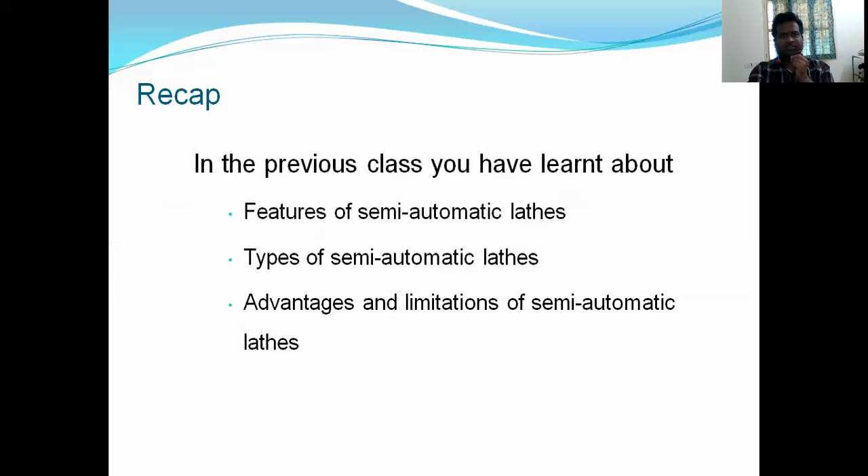Why are production lathes designed? To meet customer demands. We have chain lathes, with some changes made on the engine lathe, that's why production lathes were developed. In today's session, we are going to learn about the copying lathe, and its comparison with other types of lathes, features of copying lathe, comparison with other types, and suitability.

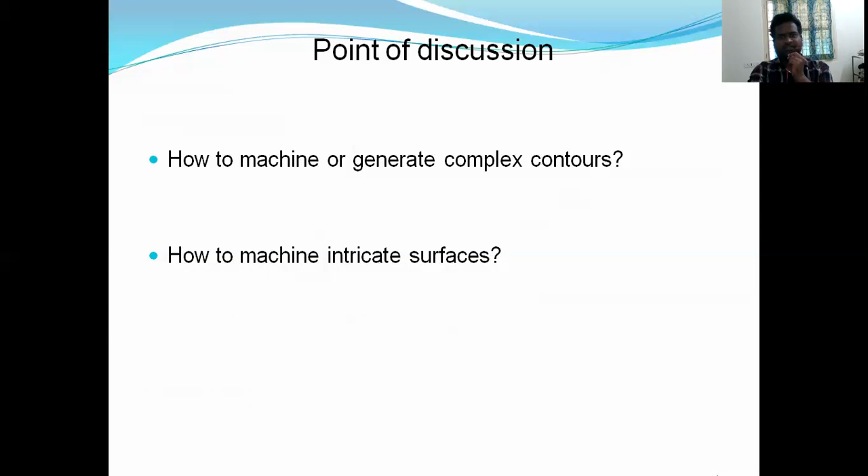Before discussing the copying lathe, how do we machine or generate complex contours? How do complex shapes develop on the lathe machine, and how do we machine intricate surfaces? These are the questions that arise when doing operations on the lathe machine.

The solution is solved by using the copying lathe. As we discussed copying lathes in our types of production lathe session, we covered some points there. Now we're going into depth about the functions of the copying lathe - how to machine or generate complex contours and intricate surfaces. Intricate shapes, surfaces, and complex contours are not manufactured under general lathe machines; we need a special type of lathe machine, which is the copying lathe.

Let me remind you how this works. We use one stylus. The stylus travels on the masterpiece, that is the template. On the template it travels, and the cutting tool travels on the workpiece. By this, the manufacturing process is done on the lathe machine.

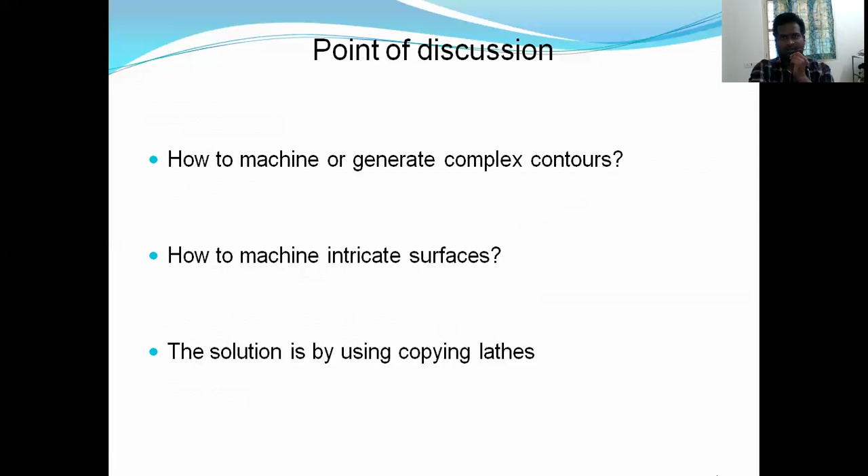The copying technique was introduced in 1923 in the USA. First it was introduced in the USA, and for some time the copying lathe played the main role in reproducing accurately the shape of the template.

So this is the history about the copying lathe. It was developed in the USA in 1923, and for quite some time the copying lathe was important in reproducing accurately the shape of the template.

Copying lathe, we have already discussed, is used for contour shapes and intricate shapes. So what are the contour shapes or intricate shapes that we have to discuss now.

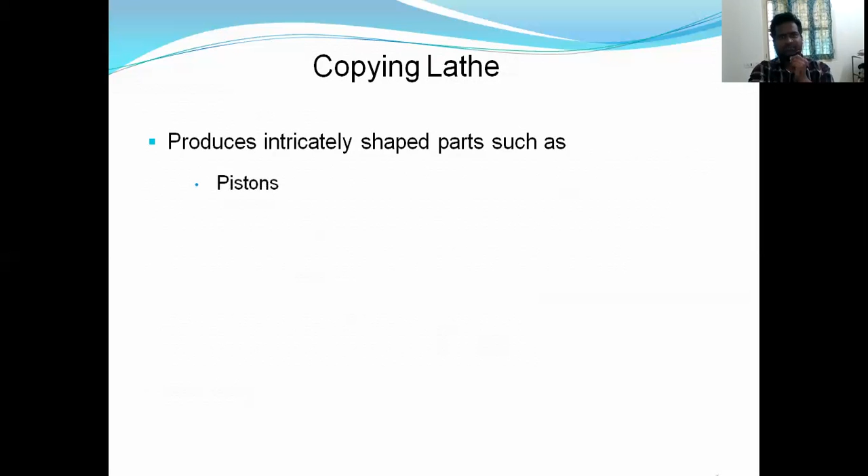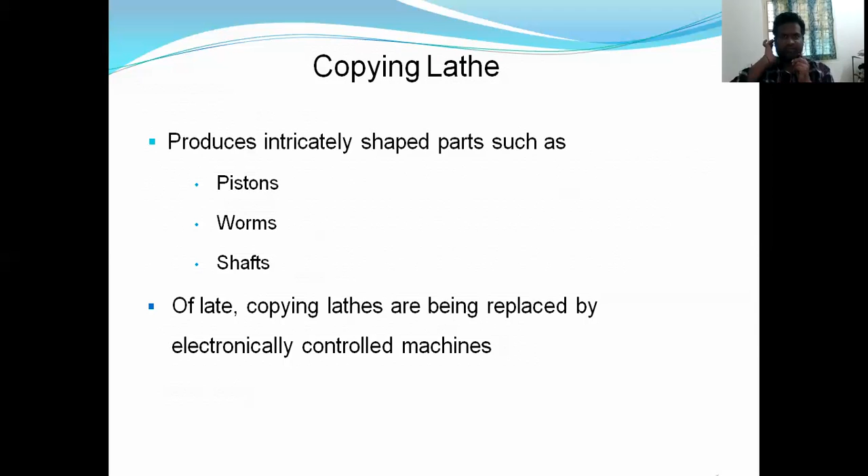It produces intricately shaped parts such as pistons, worms, and shafts. Copying lathes are being replaced by electronically controlled machines. Generally they are used for intricately shaped parts such as pistons, worms, shafts. These intricate shapes are machined by the copying lathes, which produce pistons, worms, and shafts. Now the copying lathes are being replaced by electronically controlled machines.

By this process, we are easily copying complicated shapes and intricate, complicated contours. So we can easily copy from the actually developed part, that is the template. We can call it a template, otherwise it is called a masterpiece.

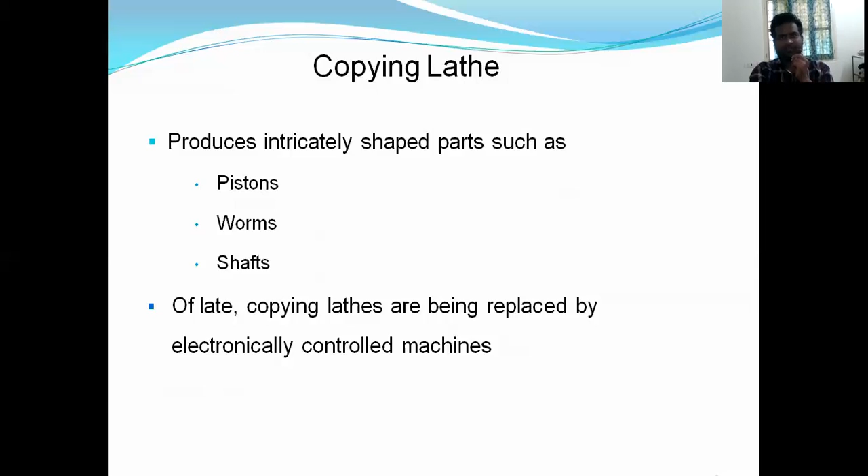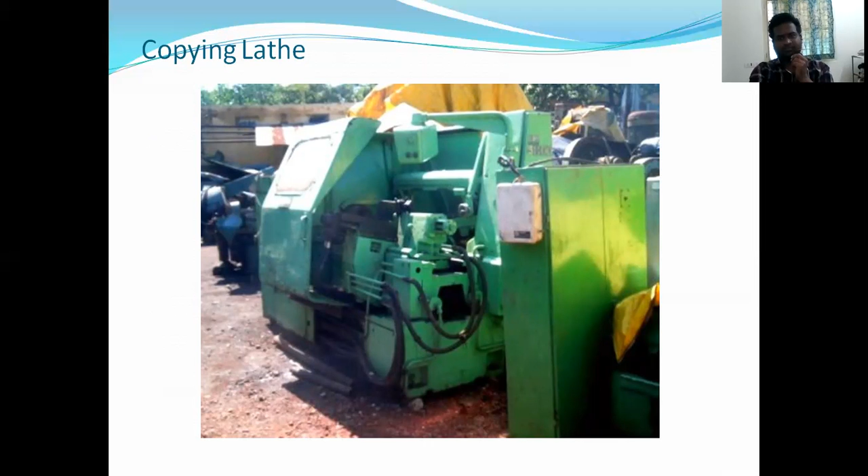So in the picture we have observed the copying lathe. This is also a copying lathe. We have both elements here: the template is placed, and here the actual workpiece is placed. The stylus is traveled on the masterpiece, and at the same time the cutting tool is traveled on the workpiece. So whatever shape is here, that shape will be reproduced on this workpiece. That's why we are having two types of shapes here, one here and one here.

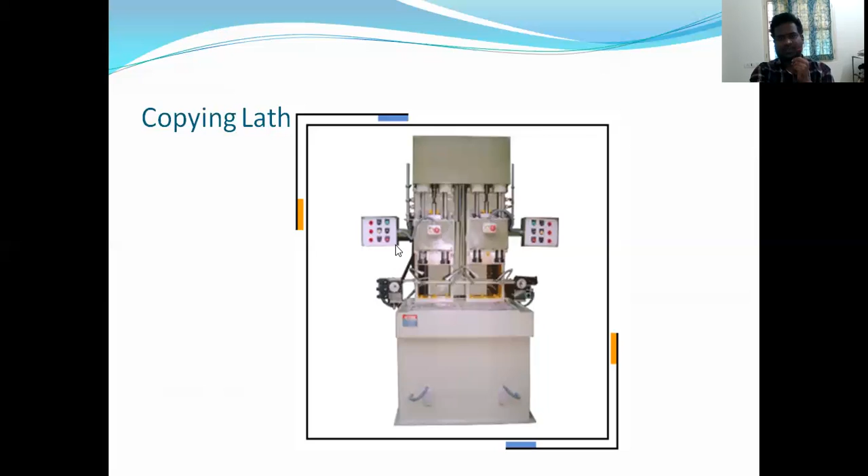So we already know the working principle of copying lathe. Now we will discuss what it is doing: it reproduces or duplicates any desired number of pieces. However many pieces we need, that many will be produced.

In this copying lathe, we have already known about a follower, or a tracer, or a stylus. A profile tracer follows the outline of a sample workpiece, which will be called the master template, master plate, template, or sample workpiece.

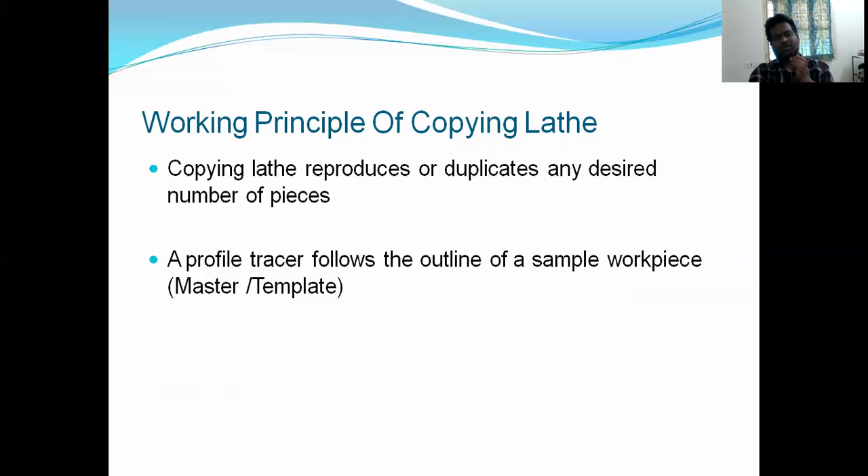So on the template or sample workpiece, this is done by means of hydraulic controls. Yes, this is the working principle: the copying lathe produces or duplicates any desired number of pieces. The profile tracer follows the outline of the sample workpiece, and this process is done by the hydraulic controls. The turning tool moves synchronously with the profile tracer.

The turning tool, as I already told you, is the cutting tool. It moves synchronously, meaning synchronized and arranged with that movement of the profile tracer, and the contour of the model is transferred to the work.

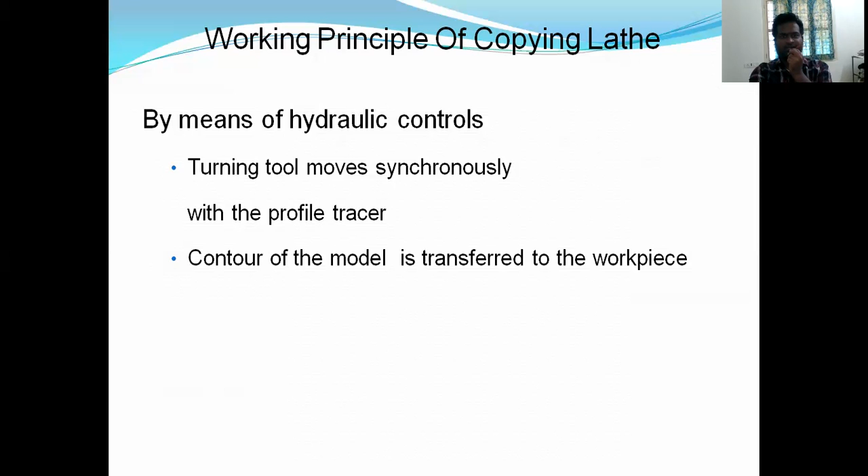The longitudinal feed and cross feed of the machine are regulated electro-hydraulically. The spindle speed is the only function which is still set mechanically.

Here the cutting tool is traveled synchronously on the workpiece, and the longitudinal feed and cross feed of the machine are regulated electro-hydraulically, done automatically. Electro-hydraulically means they are the actuators, and these actuators operate the longitudinal feed and cross feed of the machine.

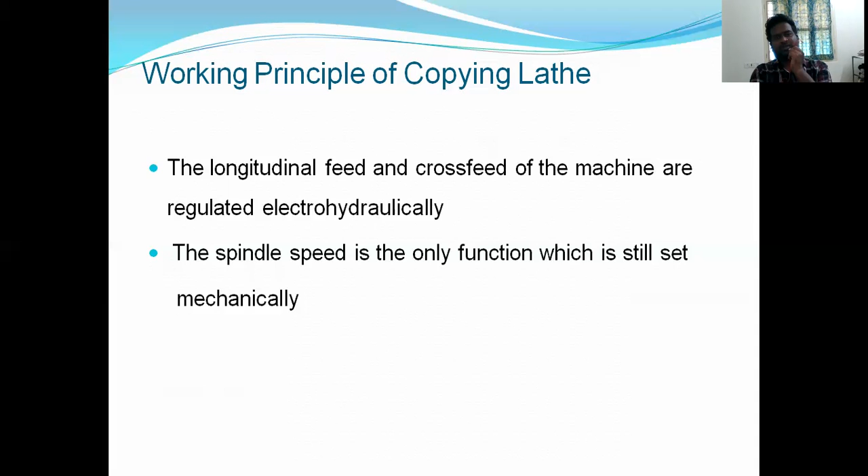Here, some manual operation is also there. That is the spindle speed, which is the function still set mechanically. In the working principle of a copying lathe, the spindle speed is the only function which is still set mechanically. Other feedings and cross feeds are regulated electro-hydraulically. That's why the spindle speed is the only function which is still set mechanically.

In the diagram itself, we have observed the operating of a semi-automatic copying lathe. Semi-automatic copying lathe means here human intervention is there, as we have already taught, to control the spindle speed. All other feedings and mechanisms are done by the actuators.

Observe here which is the copying lathe and which is the actual lathe. Here we are observing the copying slide, and this is the tracer unit. So here the tracer stylus, it will also be called a template. And so it is the carriage, and in this carriage, its entire thing is fixed.

And come to here, another setup - that is the workpiece is fixed. So this entire part is the workpiece. We have observed after the manufacturing process, we have observed this.

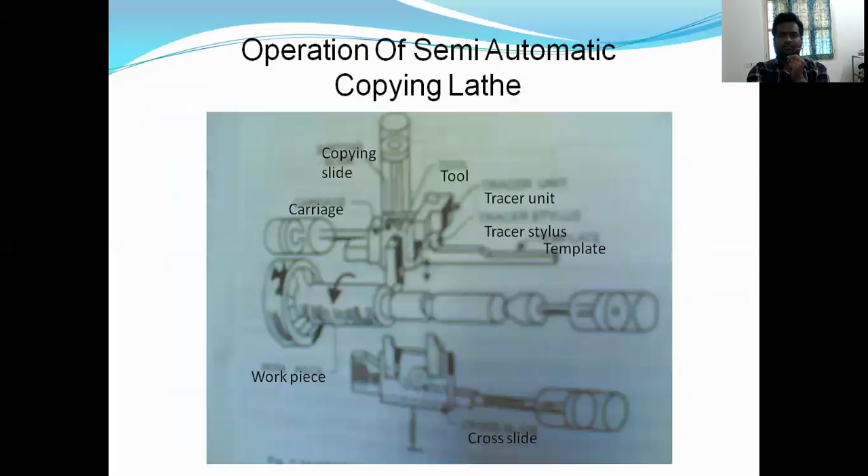So this is the operation of the semi-automatic copying lathe, and this is the hydraulic servo copying lathe.

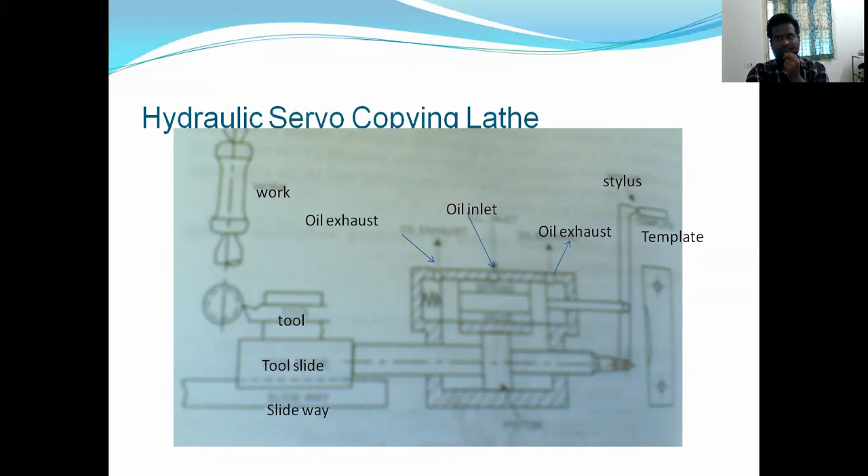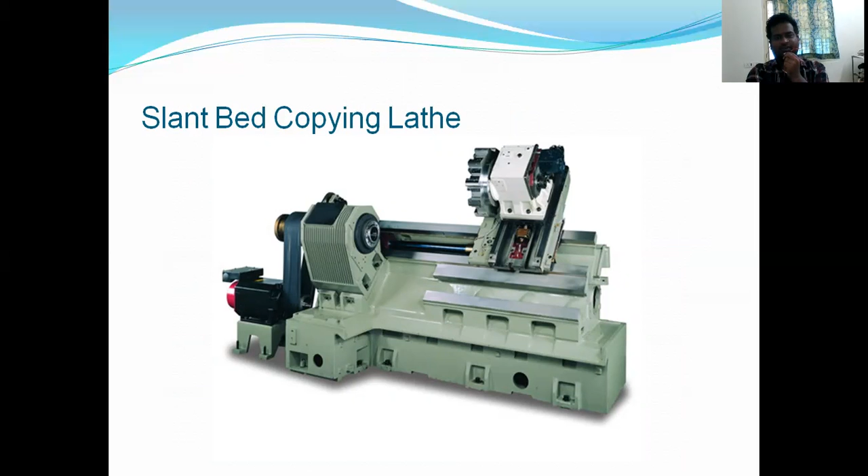The picture we have observed is the slant bed copying lathe. So slant beds hold the heavy jobs, heavy workpieces - they can hold and do the works.

We also have the copying lathe, and here we have some limitations in the copying lathe. That is, the masterpiece has to be produced first by other means. This is the main question that arises while doing the copying lathe - first we have to develop the masterpiece. But the complex and contour shapes are developed by the copying lathe itself, as we have done so far. Here, first we have to do the masterpiece, which also has different complex contours and complex shapes.

So that should be developed in another machining operation, right? That's why it has this limitation. So it has to be produced by another process.

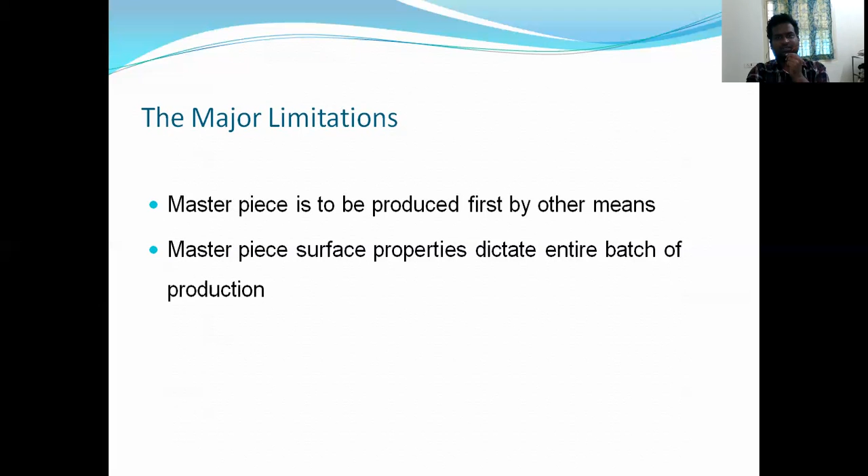The masterpiece surface properties dictate the entire batch of production. That's why we have to develop the masterpiece in the correct way. Then only can we get the other products in good manner. Otherwise, we will lose the entire thing. So that's why we have to develop the masterpiece correctly, because the surface properties dictate the entire batch of production.

Let us summarize before discussing lathe motion. We have discussed copying lathes, which generate complex contours on the surface. A master template is required for generating the shapes, and the stylus or tracer is responsible for generating the profile.

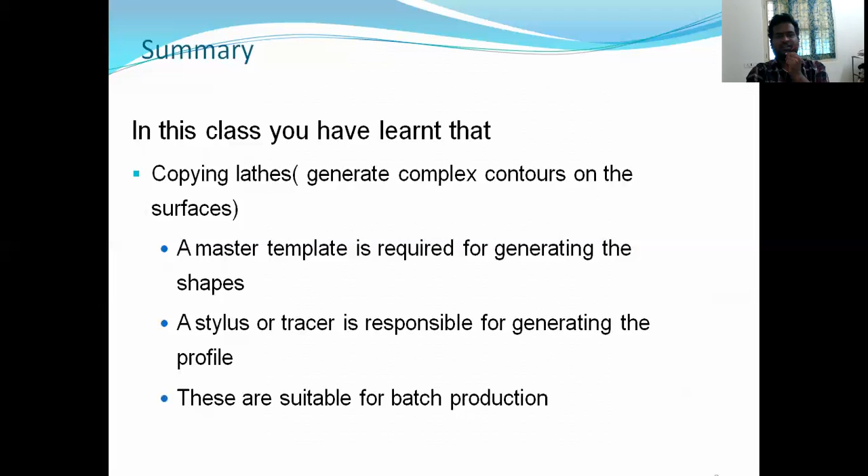Automatic lathes are suitable for mass production and batch production. Semi-automatic lathes are suitable for job production. Copying lathes are suitable for batch production, generating complex contours on the surfaces. A master template is required for generating the shapes, and a stylus or tracer is responsible for generating the profile.

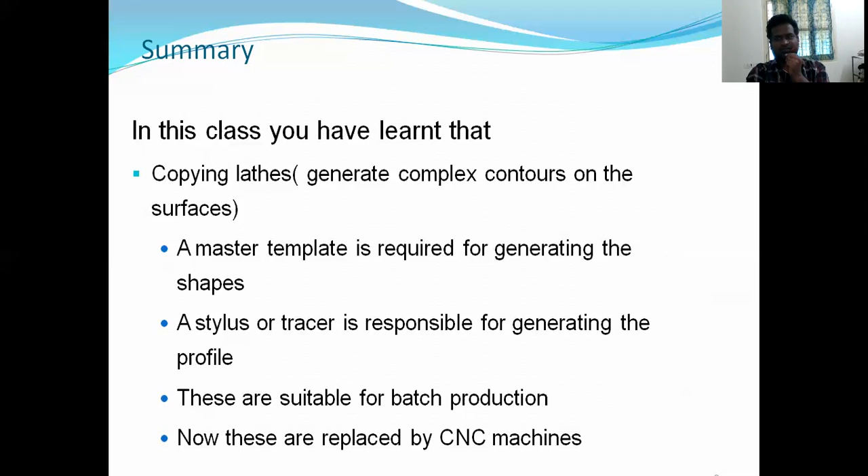Now these copying lathes are replaced by CNC machines. As we have already taught, CNC machines have a programming language, and with that programming, actuators work. Based on that actuator operation, the machine is operated, so it is fully automated. CNC machines are fully automated, and whatever complexity needs to be changed during the operation, that will be done by the CNC machine itself while doing the operation. This will be covered in the next session also.

So before going to another topic, let us do some questions on the copying lathe. We just discussed that copying lathes are now replaced by CNC machines, so you can answer this question easily.

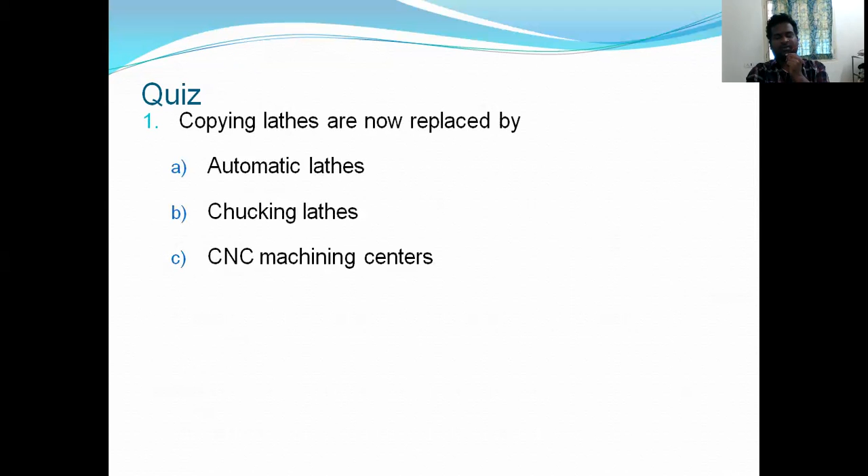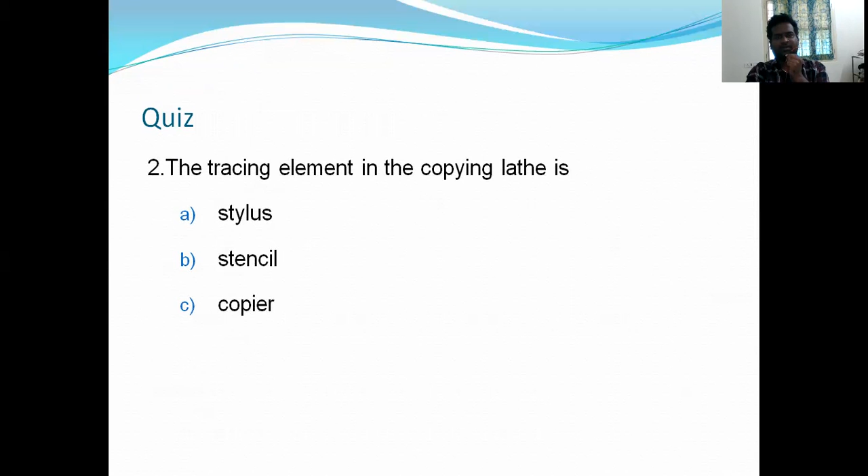The tracing element in the copying lathe is — we know that the stylus or tracer is used as the tracing element. So we can simply say that the tracing element in the copying lathe is the stylus.

The stylus has how many degrees of freedom of motion — 2, 3, or 4? Generally the stylus has 3 degrees of freedom of motion, meaning it moves in the x, y, z directions in linear movements only, not in rotational movements. That's why it has 3 degrees of freedom of motion.

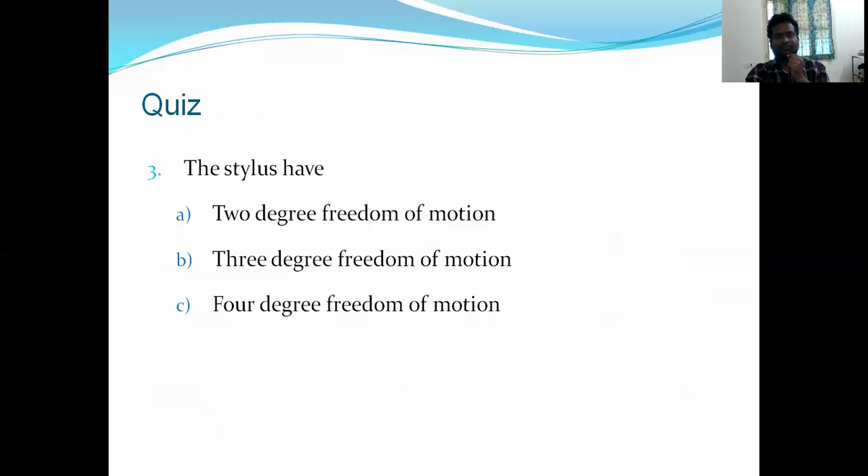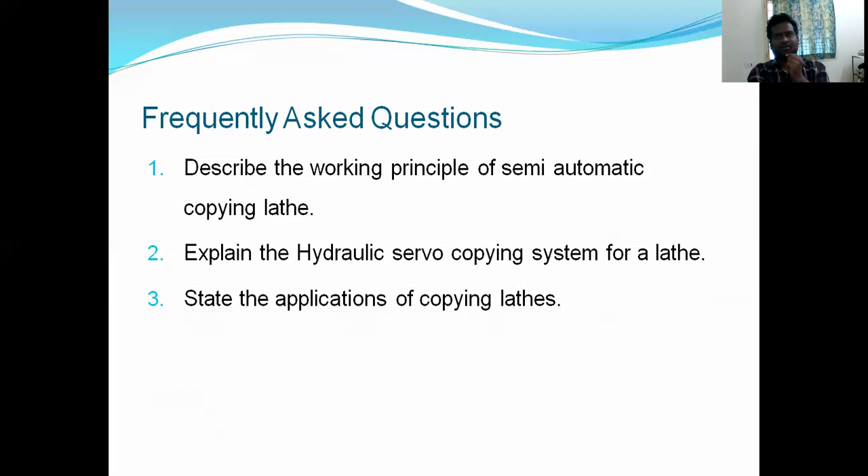So now we are moving to discussing the comparison of the engine lathe, semi-automatic lathe, and automatic lathe. We have learned so far about the engine lathe, semi-automatic lathe, and automatic lathe. If we compare these, we will get clarification about these three lathe machines — what the engine lathe has, what the semi-automatic lathe has, and what the automatic lathe has.

So, decide the suitable lathe for a given job. Before going to compare this, we also have to decide a suitable lathe for a given job. Compare the engine lathe, semi-automatic lathe, and automatic lathe. Based on this comparison, we can decide which production is suitable for which machine, and get clarification on which part should be produced on which particular machine — whether it should be on engine lathe, semi-automatic lathe, or automatic lathe. These points will be clarified after doing the comparison.

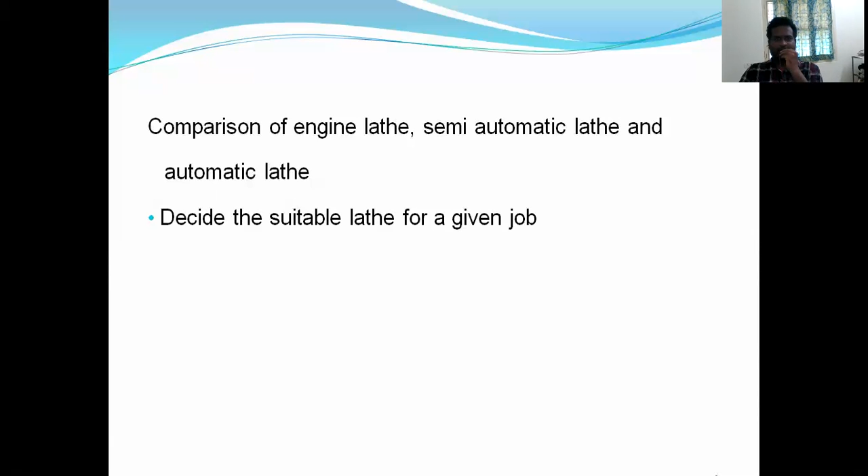First, ranking-wise, as we compare, production rate ranking: the automatic lathes are in the highest rank, semi-automatic lathes are in the higher rank, and the engine lathe is in the lowest rank. Production rate means we produce the products within less time, and among these three machines, we have to observe which machine produces products within less time.

We have learned in our earlier sessions that automatic lathes produce products within less time. There is no human intervention; everything is done automatically. That's why it is on the highest rank.

Next is semi-automatic lathes. They are in a higher position compared to the engine lathe, between the automatic lathe and the engine lathe. It also produces products within less time, but compared with the automatic lathe it has less number, while compared to the engine lathe it produces more numbers. So compared to the engine lathe, semi-automatic lathes produce more, but compared to automatic lathes, they produce less. That's why they are in the middle grade.

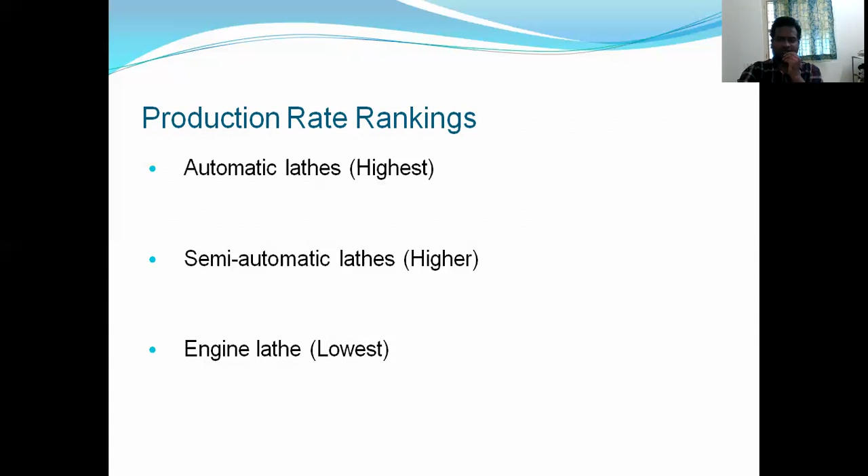Now, tool holding capacity. We already know that tool holding capacity is based on the carriage tool holders. We will point out each lathe based on the tool holding capacity.

In automatic lathes, it can hold a large number of tools at a time, that is 30 tools. This includes the tools on the cross slide and opposite to the cross slide. After adding these tools together, we get the number 30 that the automatic lathe can hold at a time.

Automatic lathes can also operate more number of tools in machining action simultaneously, 3 to 5 tools. And they need more number of tool posts: one square tool post holds only 4 tools at a time, and the magazine turret holds only 6 tools, so we need more tool posts to reach the total of 30. To summarize, the automatic lathe can hold a large number of tools at a time, operates 3 to 5 tools simultaneously in machining action, and uses more number of tool posts.

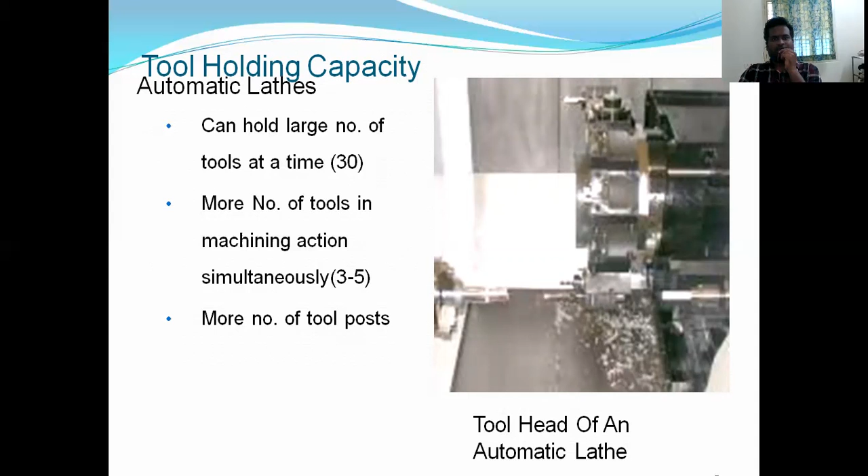Semi-automatic lathes can hold 10 to 15 tools at a time, compared to the automatic lathe. They operate 1 to 3 tools in machining action simultaneously. They need 2 to 3 tool posts. Observing the turret, it holds 8 cutting tools, and it also needs some square tool posts where we fix additional cutting tools. That's why it can hold 10 to 15 tools at a time.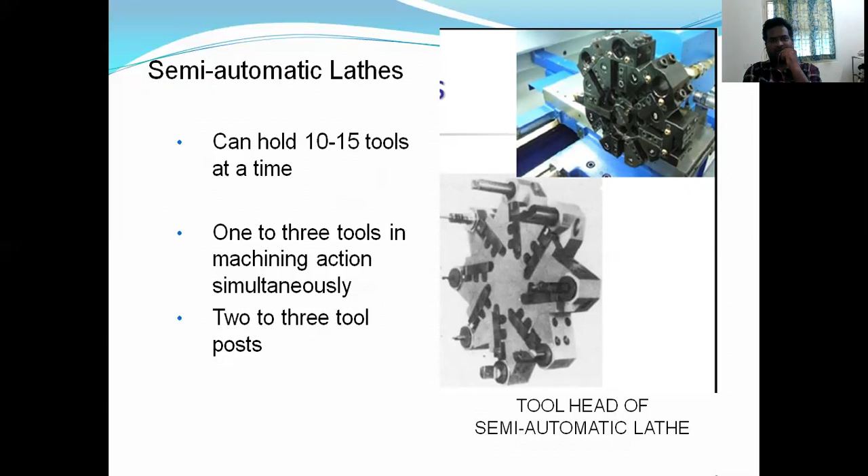It can operate 1 to 3 tools in machining action simultaneously while doing the operation, and 2 to 3 tool posts are required in the semi-automatic lathe for holding these 10 to 15 tools.

Now we come to the engine lathe. As we know, the engine lathe can hold only 4 tools maximum at a time because it has only one square tool post. With that square tool post, it can handle only 4 tools at a time. But sometimes, when doing a drilling operation, we can hold the drill bit on the tailstock.

Hardly it can operate two tools in machining action simultaneously. One is doing the turning or some machining operation, and the other is doing drilling or reaming operation. So simultaneously it can operate 1 to 2 tools. In this engine lathe, it has only one tool post, but sometimes the tailstock holds one tool. So this is all about the tool holding capacity.

Recalling an automatic lathe, it can hold 30 tools at a time. In a semi-automatic lathe, it can hold 10 to 15 tools at a time. In an engine lathe, it can hold a maximum of 4 tools at a time. In an automatic lathe, 3 to 5 tools operate simultaneously. In a semi-automatic lathe, one to three tools operate at a time. In an engine lathe, two tools can operate simultaneously.

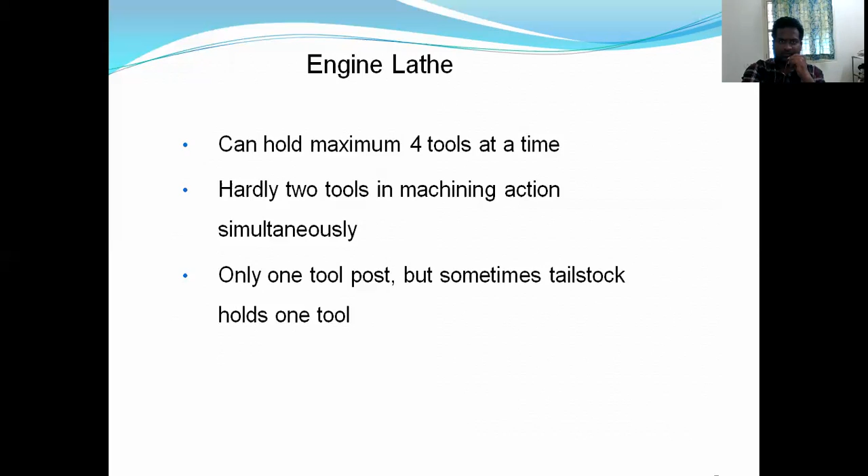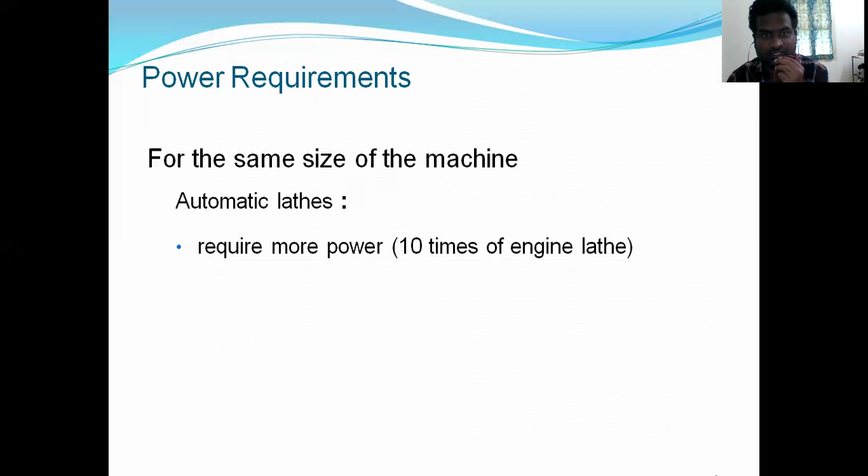Moving to power requirements, as automatic lathes are automatically operated, they require more power compared to semi-automatic lathe and engine lathe. It requires more power, that means 10 times greater than that of the engine lathe.

The spindle rotates at a higher speed, that is 3000 rpm. Automatic lathes require more than 2 motors for getting different motions. So the power requirement is more, that is 10 times of engine lathe.

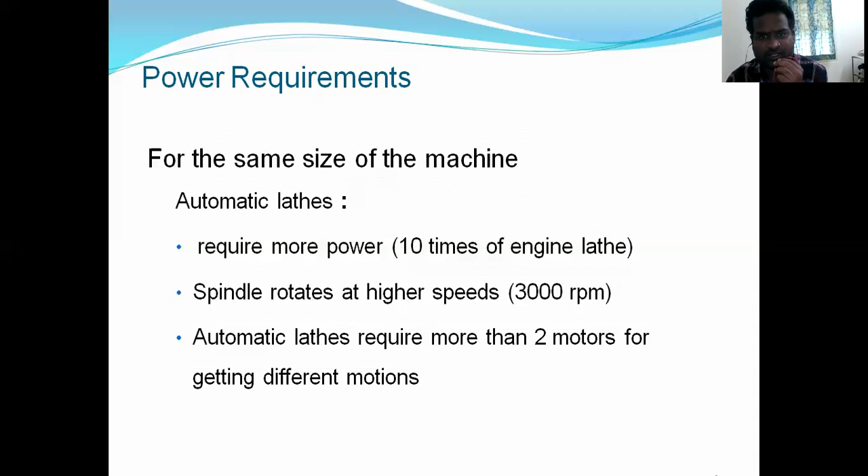Spindle rotates at higher speeds, 3000 rpm. Automatic lathes require more than 2 motors for getting different motions. And for the same size of machine, semi-automatic lathes compared to engine lathe require 5 times more power than the engine lathe. So why are we comparing with the engine lathe?

Because we developed the first engine lathe, but to reduce some drawbacks of the engine lathe, we are developing production lathes. That's why we get these points. The semi-automatic lathe requires much power, that is 5 times that of the engine lathe. The spindle rotates at a higher speed; in automatic lathe it is 3000 rpm, but in semi-automatic lathe the spindle rotates at 1500 rpm.

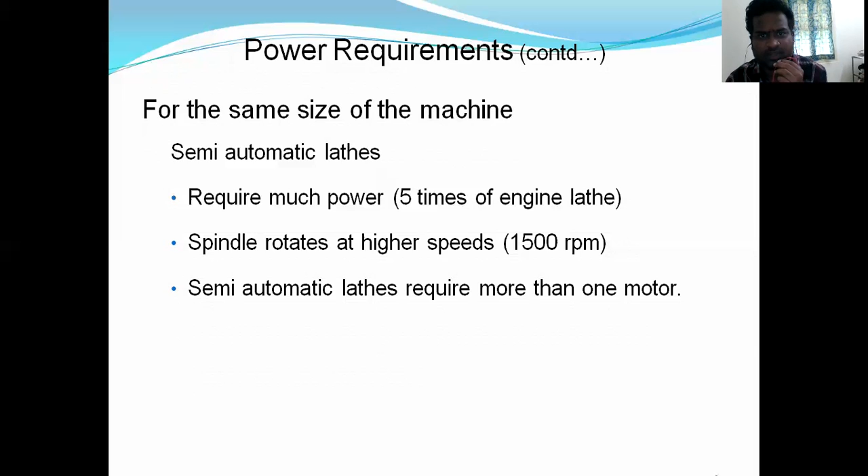Semi-automatic lathes require more than one motor. Automatic lathes also have 2 motors. For the same size of machine, coming to the engine lathe, it requires a less powerful motor.

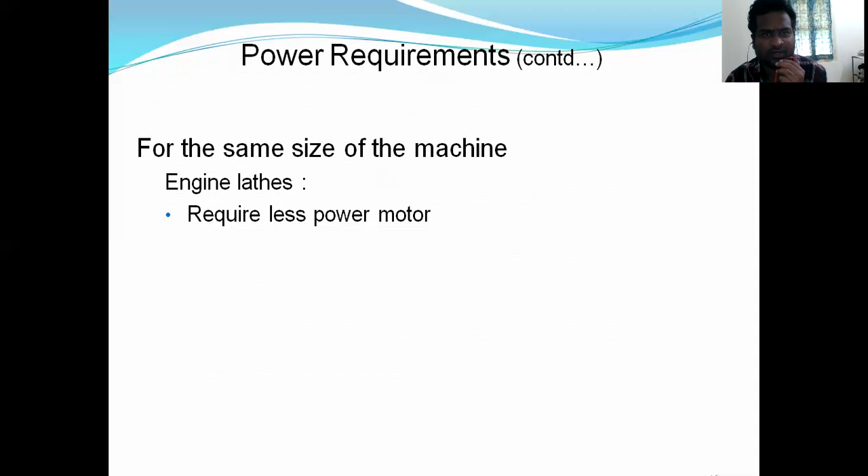So why are we discussing this now? Because based on these requirements and differences, we are selecting the suitable machine for suitable work. That's why we have compared all these points. Engine lathes require a less powerful motor. Spindle rotates at moderate speeds, 900 rpm, and it operates with only one motor.

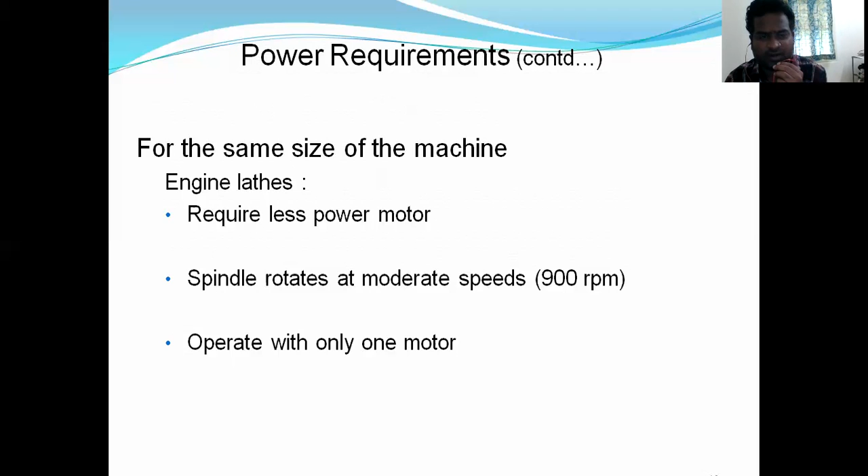These are the power requirements in engine lathe. In automatic lathe, the power requirement is 10 times higher than the engine lathe, and the spindle rotates at 3000 rpm. In semi-automatic lathes, the power requirement is 5 times more than the engine lathe, with the spindle rotating at 1500 rpm. Automatic lathes have two motors required for the rotations, semi-automatic lathes require one or two motors, and engine lathe can operate with only one motor.

These are the power requirements needed in the engine lathe. Now, production variety: this means what types of products are manufactured on the engine lathe. Based on our requirement and customer demand, we have developed that variety of products.

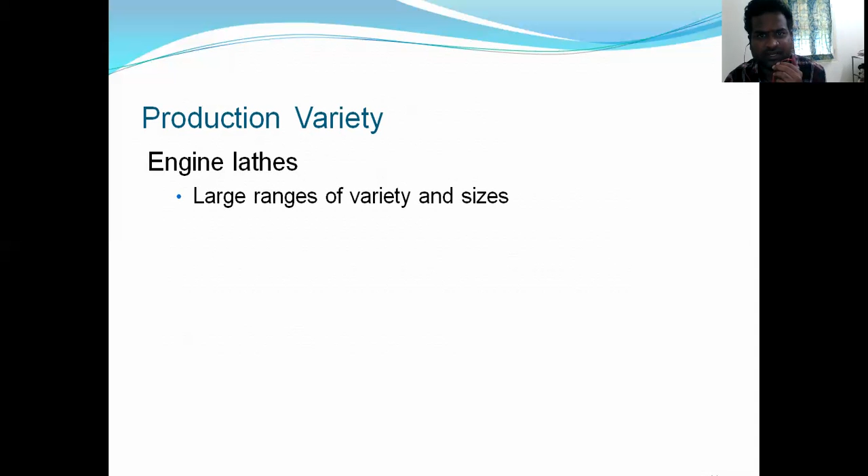Which lathe produces a good variety of products? In engine lathes, we can produce large ranges of varieties and sizes. Semi-automatic lathes produce medium ranges of varieties and sizes. Automatic lathes produce limited ranges of varieties and sizes.

This is because engine lathes are operated manually. Every time a fresh design comes, the man will do that variety of operations. Productivity is less, but variety is more, and sizes are the highest. In semi-automatic lathes, a medium range of varieties and medium sizes come. But in automatic lathes, limited ranges of varieties and sizes occur because the operation is fixed.

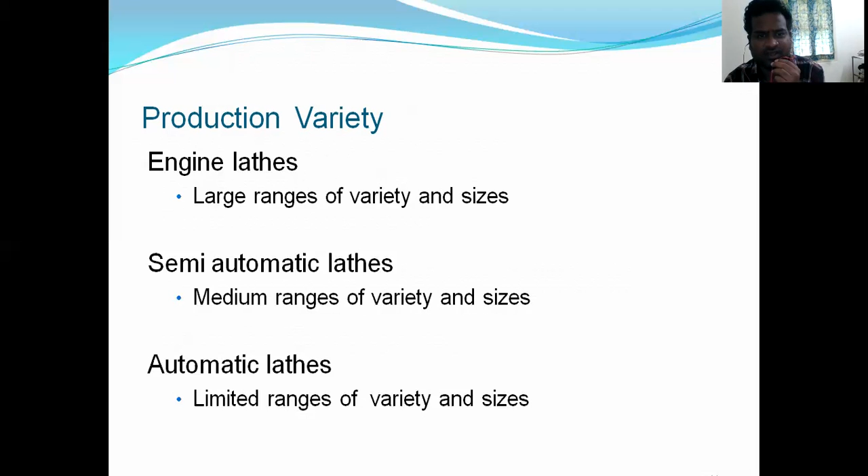The operation is fixed because the program is fixed. Based on that program itself, the cutting tool is operated, so we get identical parts every time. If we want to change the variety, we have to change the program. That's why we need another program, and again it will produce the same identical parts with that design. That's why in automatic lathes we get limited ranges of varieties and sizes.

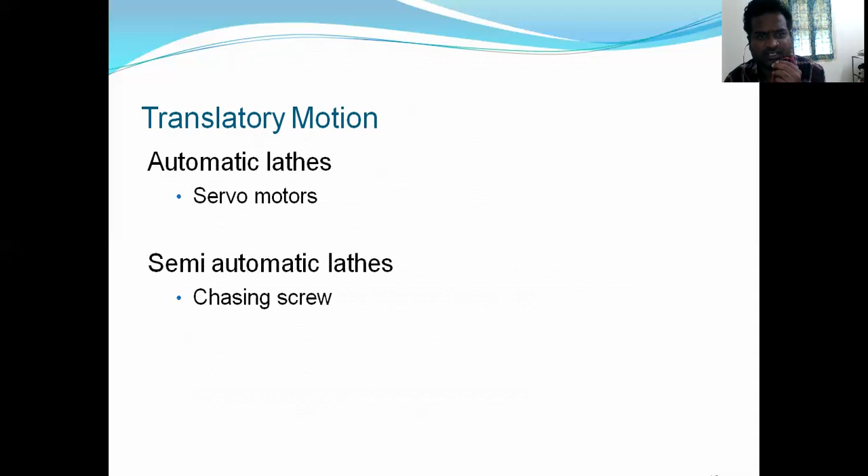Translatory motions: automatic lathes are fixed with servo motors. Semi-automatic lathes are done by the chasing screw. Engine lathes move by the lead screw, right?

We already know that mechanisms are operated by some actuators, the motors, as we have discussed. In automatic lathes, the servo motors are operated. In semi-automatic lathes, a chasing screw is required for operating the machine. In engine lathes, the feeding is done on the lead screw mechanism or split nut mechanism. So these are the translatory motions in automatic lathes, semi-automatic lathes, and engine lathes: automatic lathes use servo motors, semi-automatic lathes use chasing screw, and engine lathes use lead screw.

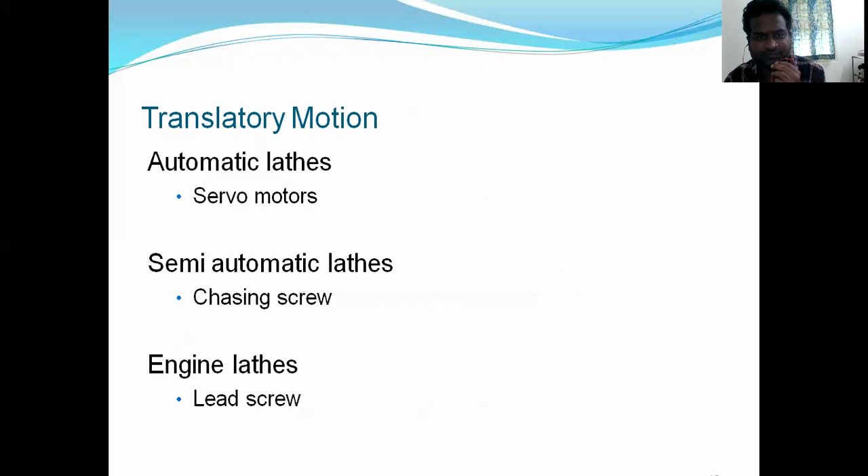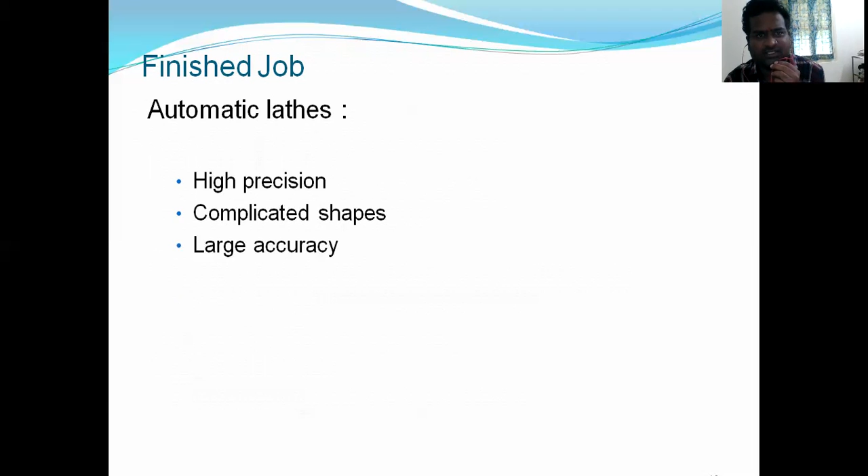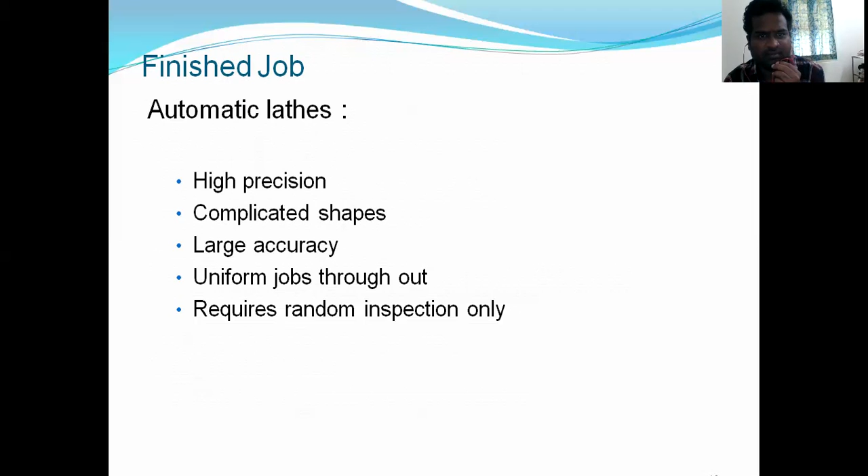Finished job from automatic lathes: what output comes from automatic lathes? High precision products come from automatic lathes, and complicated shapes can be made, with large accuracy. Accuracy is good compared to other lathe machines, and jobs are uniform throughout. All identical parts are uniform after automatic lathe machining, so there is no need for inspection of all products; just random operation requires random inspection only.

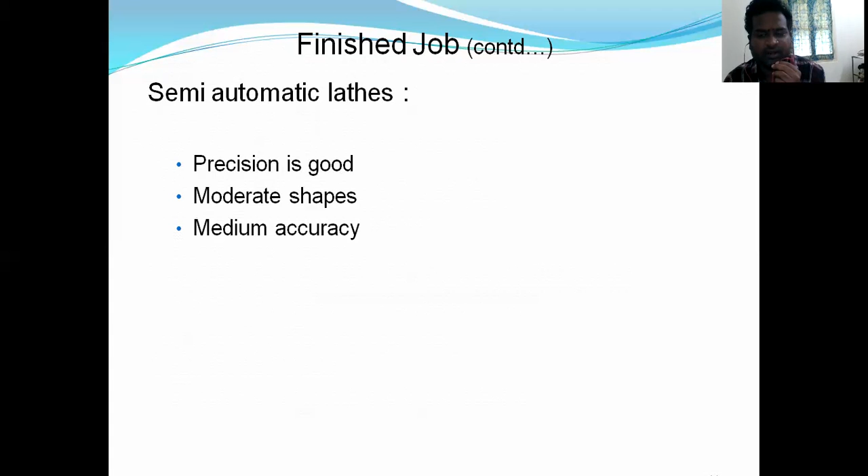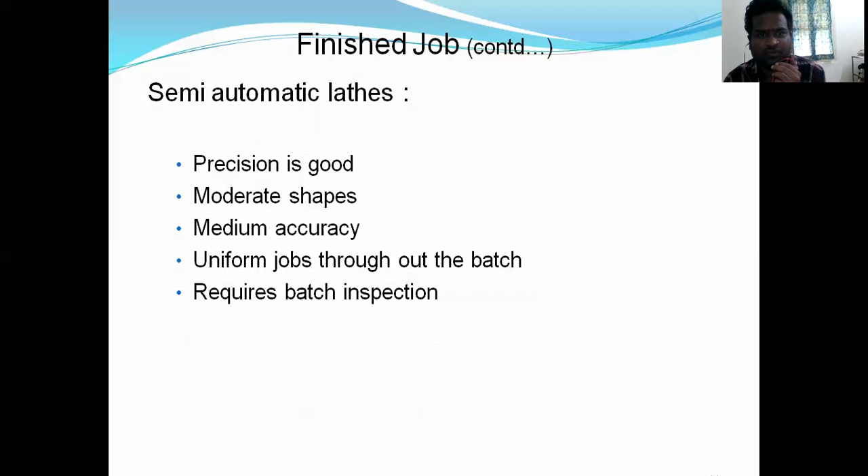In semi-automatic lathes, compared to automatic lathes, precision is good and we can develop moderate shapes with medium accuracy. Jobs are uniform throughout the batch, which requires batch inspection.

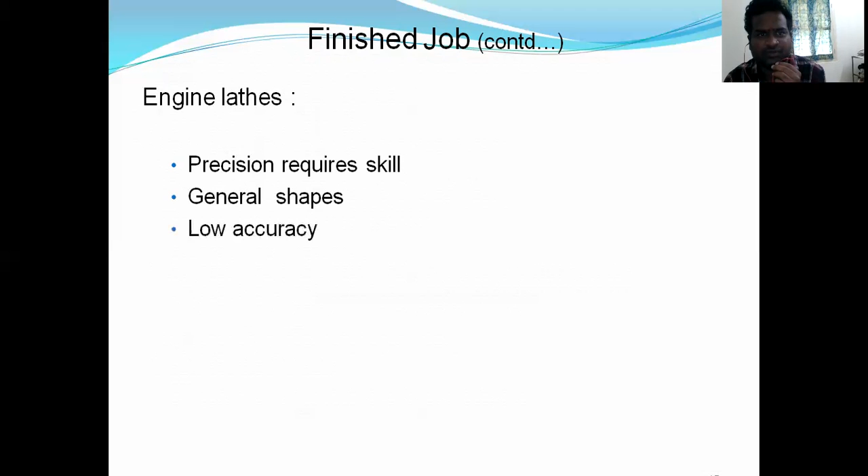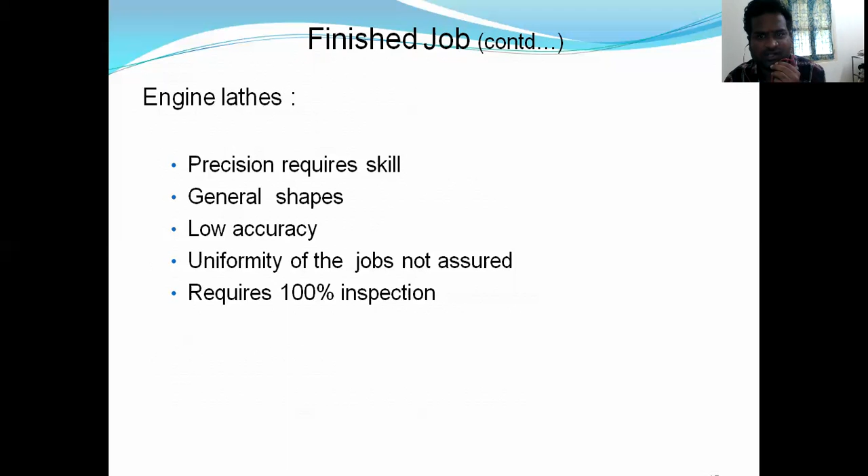In engine lathes, precision requires skill, general shapes are produced, and accuracy is low. Uniformity of the jobs is not assured, so it requires 100% inspection of all products because it depends on the operator's skill. Uniformity is not assured because the operator works in different modes at different time levels. For that reason we require 100% inspection, based on operator skills, and it gives low accuracy. That's why we do general shapes on the engine lathe.

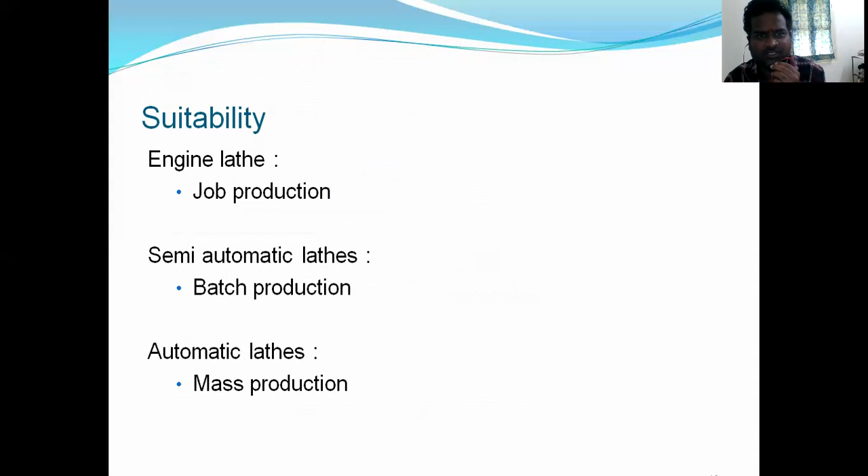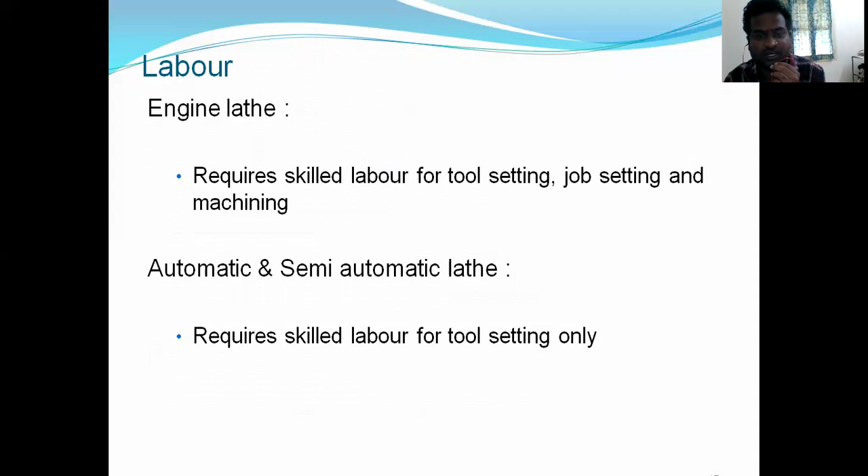Suitability: which type of production is each lathe suitable for? Engine lathes are suitable for job production, semi-automatic lathes for batch production, and automatic lathes for mass production, as we've already discussed. Regarding labor: engine lathes require skilled labor for tool setting, job setting, and machining. Automatic and semi-automatic lathes require skilled labor for tool setting only, not for job setting and machining operation.

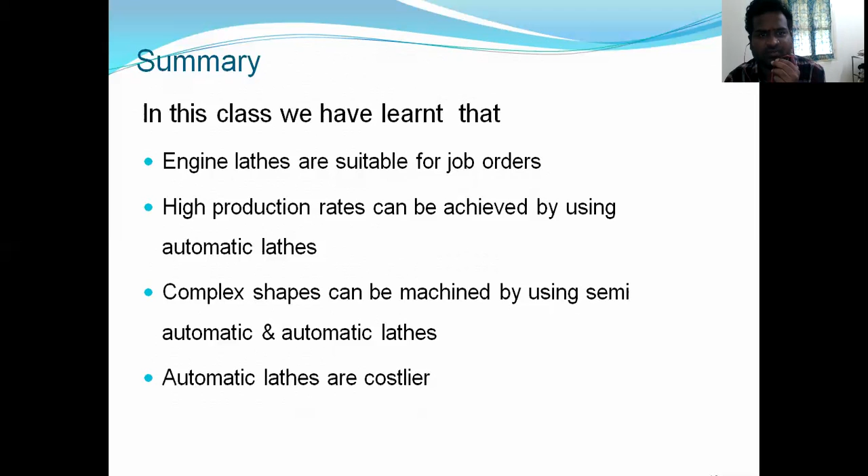So these are the comparisons we had to make. Let us summarize today's session: engine lathes are suitable for job orders, high production rates can be achieved using automatic lathes, and complex shapes can be machined using semi-automatic and automatic lathes. Automatic lathes are costlier.

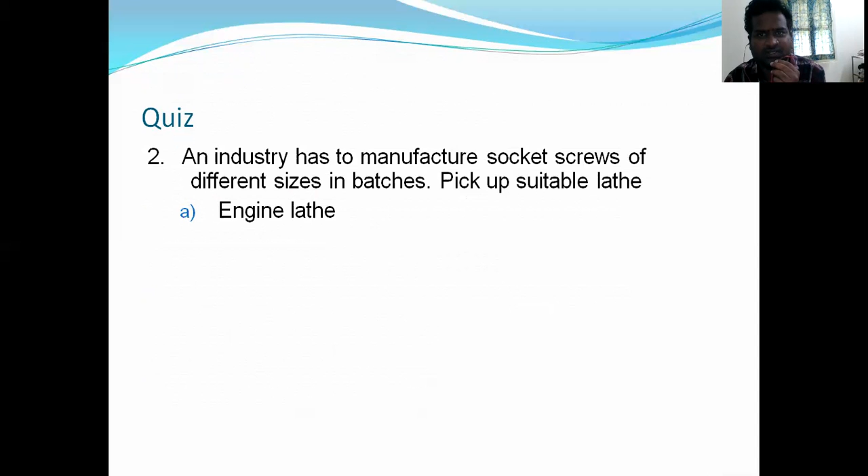Now a quiz: for machining spiral jobs, which lathe is recommended? Automatic lathe. An industry has to manufacture socket screws of different sizes in batches—pick up a suitable lathe: semi-automatic lathe. An automobile brake drum needs to be repaired by machining—which lathe is suitable? Engine lathe. These are frequently asked questions.